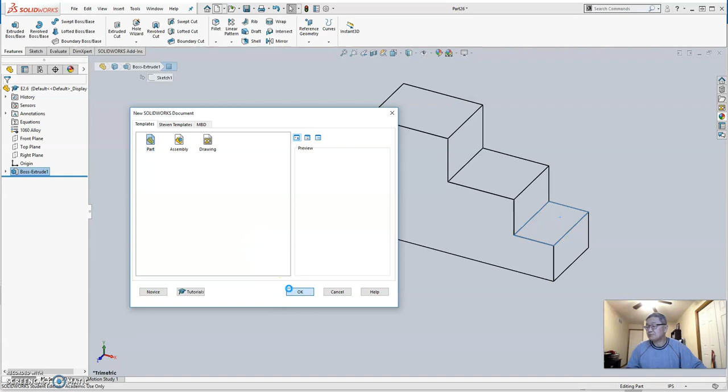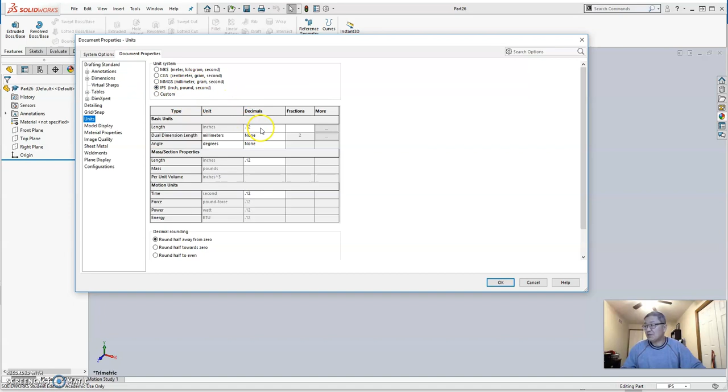Okay, this is the drawing space. Once again, make sure inch, pound, second is selected. If it's not, you can also go to Edit Document Units. It will bring the same window you saw previously for inch, pound, second. For this one, 2 decimal places would be plenty, so that is good to go.

We just click OK. So we already decided we're going to work with the front plane. Click front plane, make a sketch.

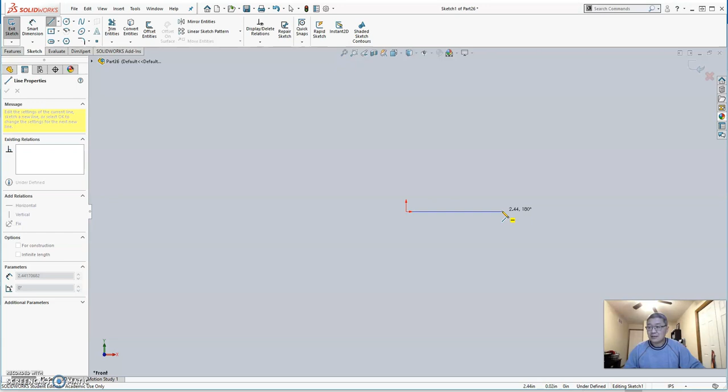Now we're going to click the Line command. Make sure your first point starts from the origin, then go horizontally to the right, making sure the horizontal yellow snap appears, and make your second click. Then go up, making sure the vertical snap is on, the vertical yellow bar, and make a second click.

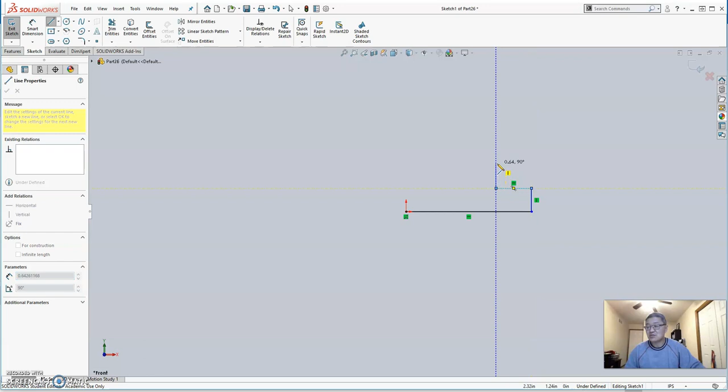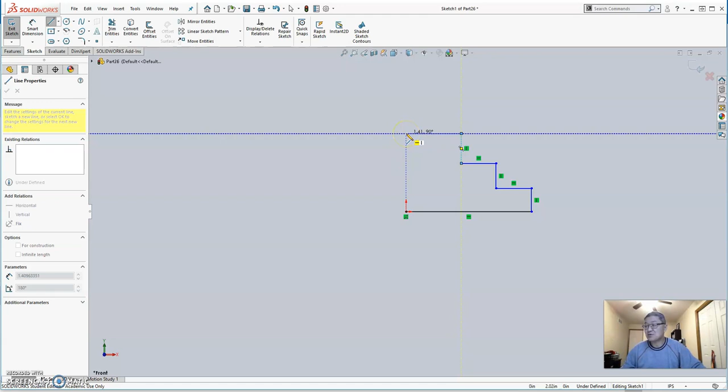Now go horizontal. Don't worry about the dimension at this point, we're going to use smart dimension. Make a third click, making sure the horizontal bar appears. Go up, vertical bar appears. Go horizontal again, making sure the horizontal bar appears. Go up again, then go all the way, making sure the vertical snap is on, meaning it clicks this vertical line right on top of the origin. Make a click, then coming down, click origin again.

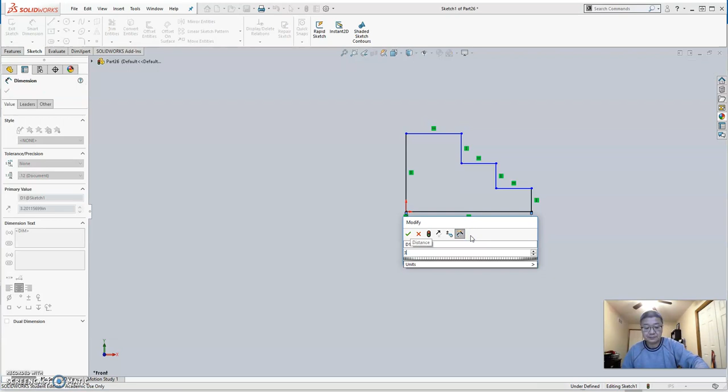So essentially we finish the profile, but we don't have a dimension yet. We're going to use smart dimension. Add the dimension for this line first - click this line, and the dimension is 3.5. Hit enter, and the height of this end is 0.7.

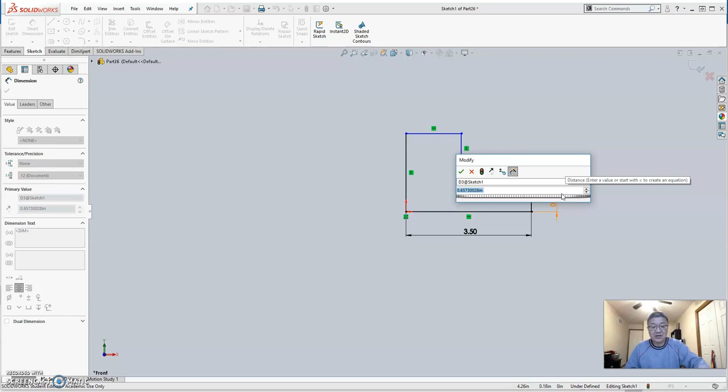The height for this step is the same as this one. So instead of putting 0.7, you input an equation equal to. You can move this one away. Put the equation equal to, then click this unit, click this dimension, so this dimension would equal that dimension. Then if you click this green check, it gives you 0.7. That's what we wanted, but notice it's calculated - if this one changes, this one will change accordingly.

We also need to do this dimension. Add this dimension, that is 2.25. Once we add this dimension vertically, this dimension vertically, this dimension vertically, do we need to add this dimension? The answer is no, because if you do that, it's called overdefined.

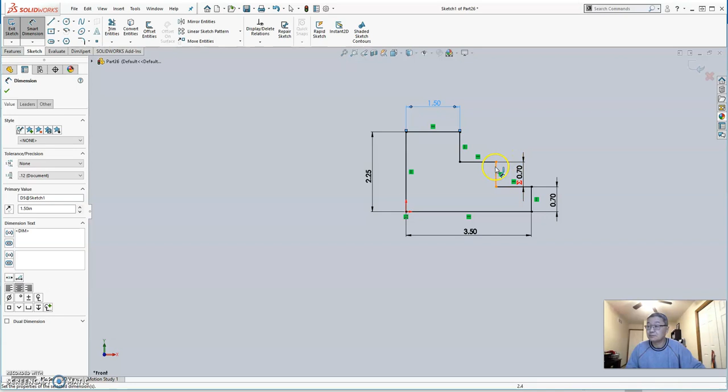We also need a dimension for this one, it's 1.5. We also need a dimension for this one, 1.25.

Once we have this dimension, do we need this dimension? The answer is no, because once you have this, we have a 3.5, so we're good. So this dimension, we're good. If you pay attention at the bottom, it says fully defined, so we're good to go.

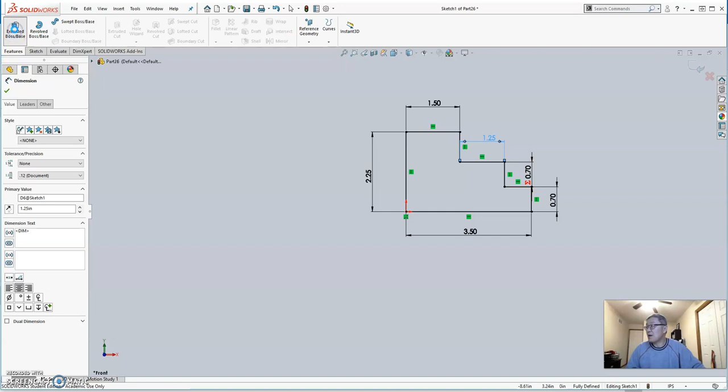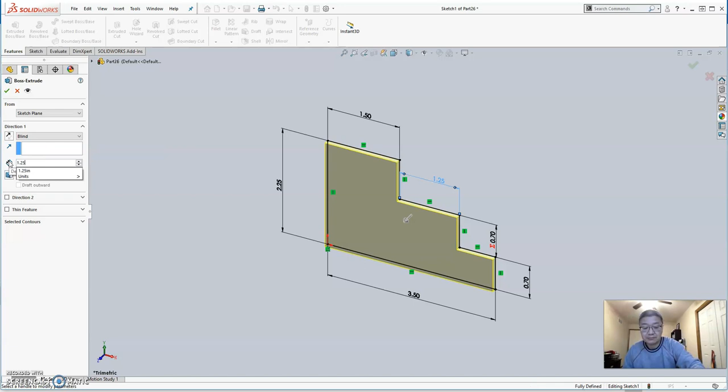So we're going to click Feature, Extrude Base, and in this case, because we need to keep the origin on the front surface, we're going to extrude it backwards. We're going to choose the depth as 1.25. However, if you see it extruded forward, make sure it extrudes backwards by clicking reverse direction. Okay, now it's good, that's what we wanted. Click this green check, so we finish this drawing.

Once you finish your drawing, you'll notice the origin disappears. If you want your origin to appear, go to View, there is Hide and Show, and click Origin. Click this origin, and now your origin appears right here.

If you go to this display type called hidden line removed, you can see better - this is the origin. If you rotate that, you can see that's origin right there. Okay, so that finishes this drawing.

By the way, we also need to add materials to this object. Click this one, right click, edit the property, edit material. For this one we're going to choose aluminum alloy, aluminum 1060, click apply, then click close.

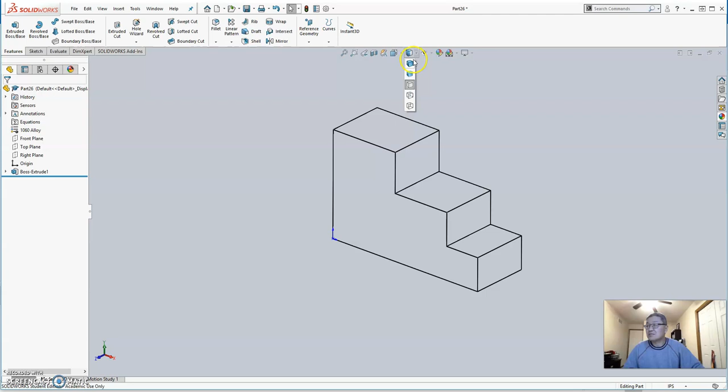So now I'm going to show this display. Now we can go to Evaluate, Mass Properties. We can show for this particular object the mass is 0.69 pounds, the density 0.1, the volume, and the center of gravity, which is the center of mass - that's right here. So we have that dimension as well.

By the way, for the exam with SolidWorks, if I ask you to draw something, this is actually how I can check if you got the dimension correctly. For instance, if your dimension is not right, your mass will be wrong. Also, the center of gravity would be wrong if you did not draw the origin accordingly, so you will get a different center of mass.

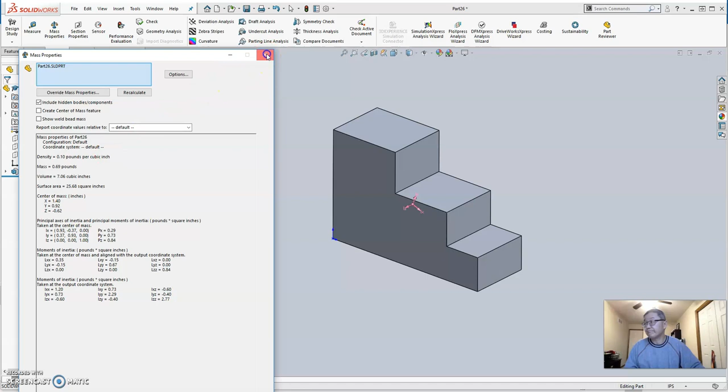Okay, let's save this file. I'm going to save this file into my folder, the folder I created. Once again, you must pay attention to which folder you work with - 120, Spring 2020, I have SW, this is exercise, I'm going to use E 2.6.

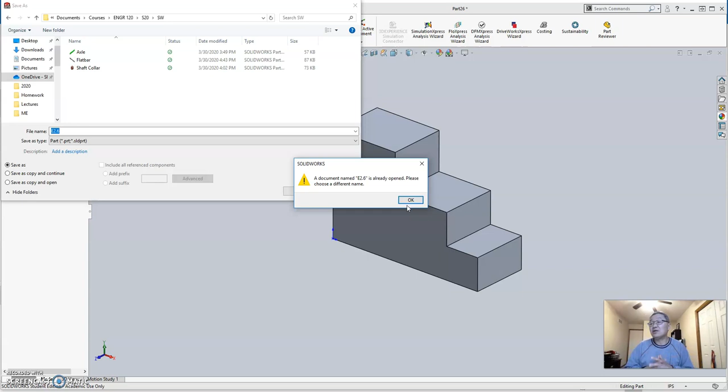Oh, it's already there, so you cannot have the same name. I'm going to use 2.6, yes, I'm going to put 60, so that would be good because I have another file called 2.6. Okay, so save that, because you cannot open two files with the same name. So that one is for you - you just need to save E 2.6. That is good. All right, see you next video.